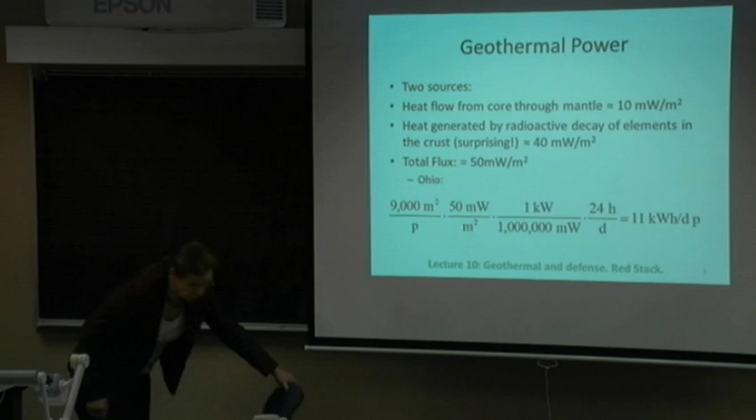So geothermal power, there's basically two sources. One is the core is molten, and there's the mantle, and there's heat flow from the molten core up through the mantle. It amounts to about, and notice the number here, 10 milliwatts per square meter. All those other energy sources we were talking about in terms of watts per square meter, but this is milliwatts per square meter, and this is surprising. There's also heat generated in the crust itself by radioactive decay of elements naturally occurring there. Amazingly, that's 4 times greater, 40 milliwatts. It's still not huge, but it's non-trivial, 40 milliwatts per square meter from radioactive decay.

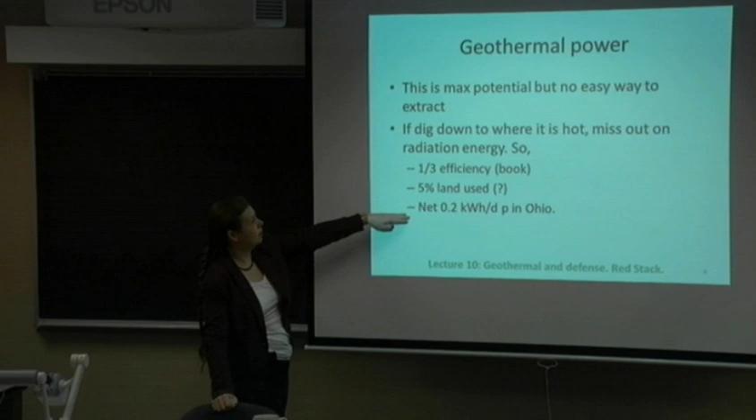So the total flux of heat from inside the Earth out is 50 milliwatts per square meter. If you figure that out for Ohio, how many people, and so forth, it works out to 11 kilowatt hours per day per person. Not insignificant, if we can get it. That is the max potential, but it turns out there's no easy way to extract all that heat. If you dig down to where it's really hot, you miss out on the radiation energy, because that only happens in the crust. So if you figure a third efficiency, this is the book's number, and maybe 5% of the land used - oh darn, maybe we could get 0.2 kilowatt hours per day per person in Ohio. Not as big as I was hoping.

So here's a quiz for you. Which is the lowest quality energy? Electrical, mechanical, chemical, or thermal? Oh, we have a shy class. How many people think it's electrical? No one's buying that. How many think it's mechanical? Nobody thinks that. How many think it's chemical? How many think the lowest quality energy is thermal? Right, which is what the Earth is offering us through geothermal. So it's energy, not the greatest, but it has uses like heating.

So how does it work? Well, if you happen to live in Mammoth Hot Springs, Yellowstone, there's hot springs there, and you can just put a tube and pump hot water into your basement and run it up through your house to heat it. Unfortunately, in Ohio it would be a pretty long way to pump that - I think they would run out by the time they got to North Dakota or so. So we don't have hot springs in Ohio that I know of.

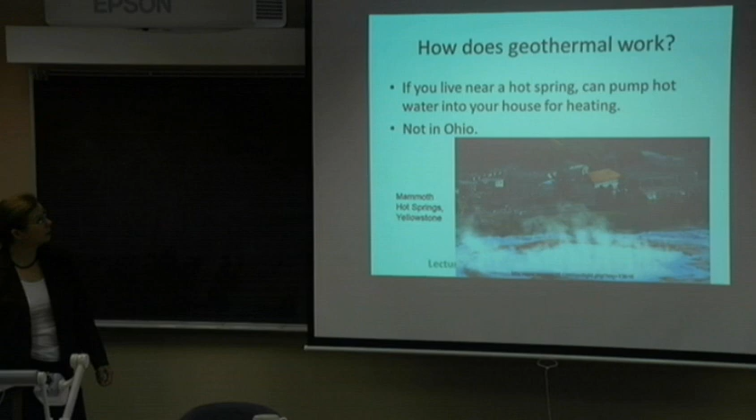Second way is a heat pump. The idea is you drill these wells - here's some vertical wells. Water is pumped out of your house. Let's say you're trying to cool, so you take hot water, because it's summer, pump it out here and down into the ground, and as it goes down it interacts with the cold earth, because the earth is 50 to 60 degrees maybe, and if it's 80 degrees outside, it's cooler down there. So as your water gets pumped through these tubes, it cools down and comes back as cool water, which you can then run through your house to try to cool it down.

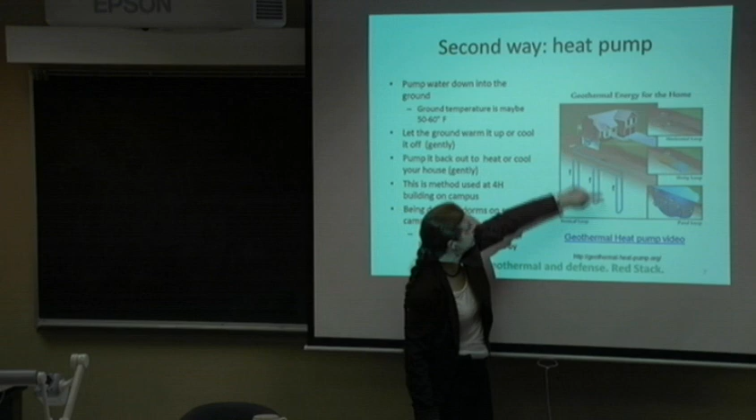So the water goes in there, and you're trying to either warm up the water, or in this case, cool it down. But in winter, I just reverse it. I still take the water out of my house and pump it down, but now maybe it's 40 degrees in the house and the water's cold, and I'm trying to heat it up to 50 or 60. It's not great, but it's something. I pump it back in and use it for heating. So I can only warm up or cool off the water gently because there's not a big temperature change, and then you pump it back into your house to gently heat or cool it.

This method is being used on the 4-H building on campus, next to the Schottenstein, with vertical wells. The building has a big parking lot out behind it, and before they built the parking lot, they drilled all these vertical wells. You go into the basement of the building, and they give tours sometimes - you should go if you get a chance. They'll show you all the pumps and stuff in the basement, and they've got monitors that show the temperatures of the water going various places.

They're also starting to do this for the dorms on South Campus, that big mess where they're drilling all those holes now. They ran into a bunch of problems because evidently there's a lot of water and mud underneath there, so when they're drilling these wells, they kept collapsing. I'm hearing this, I don't have it verified, but they had a lot of unexpected technical problems, and they're still putting them in. They are expected to supply about a third of the heating and cooling used by these dorms. So it's not a huge energy source, but it's something.

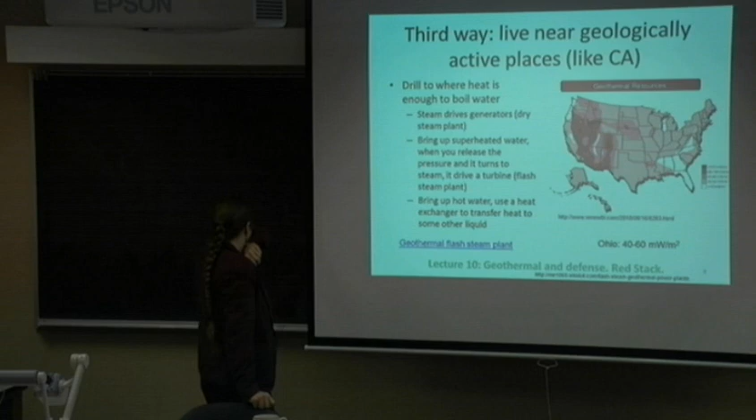A third way would be if you were living near geologically active places like California or Yellowstone. Then you can drill down to where the heat is hot enough to boil water. You take that boiled water, use it to make steam, and drive generators - that's known as a dry steam plant. Or you can bring up the water under pressure so it's superheated, and when you release the pressure it turns into steam suddenly, driving a turbine - that's a flash steam plant. Or you can just bring up the hot water and use a heat exchanger to transfer the heat to some liquid. A heat exchanger would be like two pipes near each other, or maybe one pipe inside another, where one is carrying hot water and the other cold water. The thermal energy will flow between them and exchange heat from one to the other.

Geothermal flash steam plant. Gosh, that looks like a link. Oh yes, it's going to work.

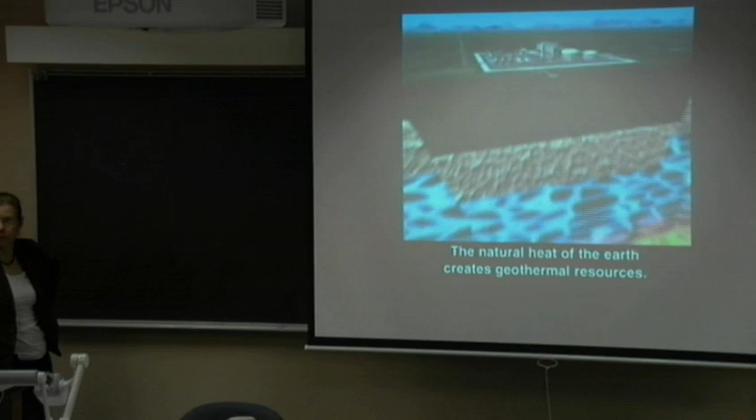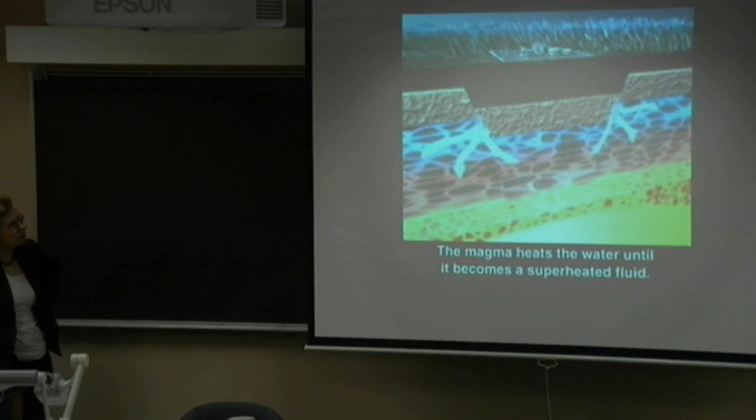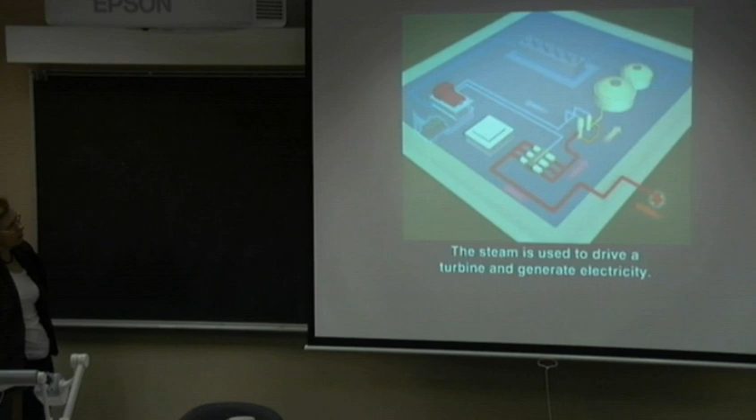Welcome to one of CalEnergy's geothermal power plants. Unlike other power plants that rely on coal or other fossil fuels to create electricity for homes and businesses, geothermal power plants use superheated fluids from the Earth's geothermal resources to generate electricity. The natural heat of the Earth creates geothermal resources. This heat comes from molten rock called magma, located at the Earth's core, deep below the geothermal resource. Over thousands of years, rainwater seeps through cracks in the Earth's surface and collects in underground reservoirs. The magma heats the water until it becomes a superheated fluid. To reach the superheated fluid, wells are drilled 5,000 to 10,000 feet below the surface of the Earth. These wells, called production wells, bring the superheated fluid to the Earth's surface, where it can be used to generate electricity for homes and businesses. This geothermal power plant uses crystallizer reactor clarifier technology, a process that turns the geothermal superheated fluid into steam while removing solids from it. The steam is used to drive a turbine and generate electricity. All remaining geothermal fluids are injected back into the reservoir for reuse.

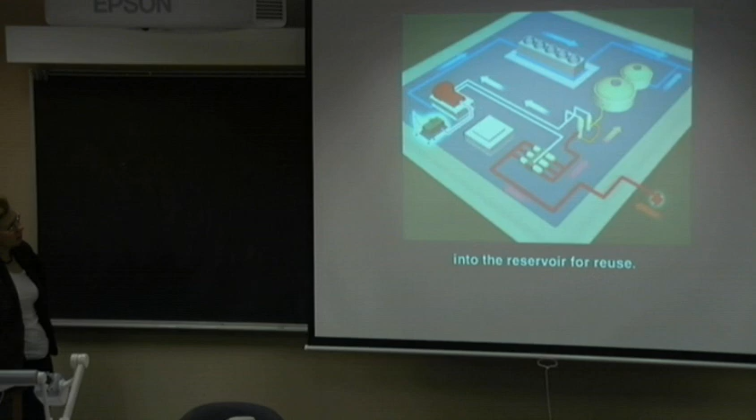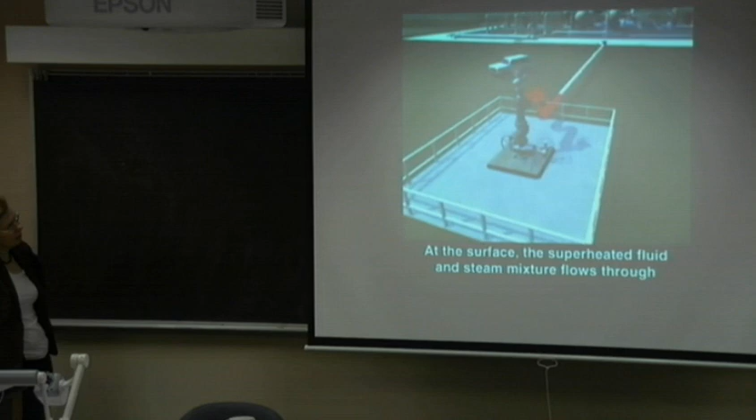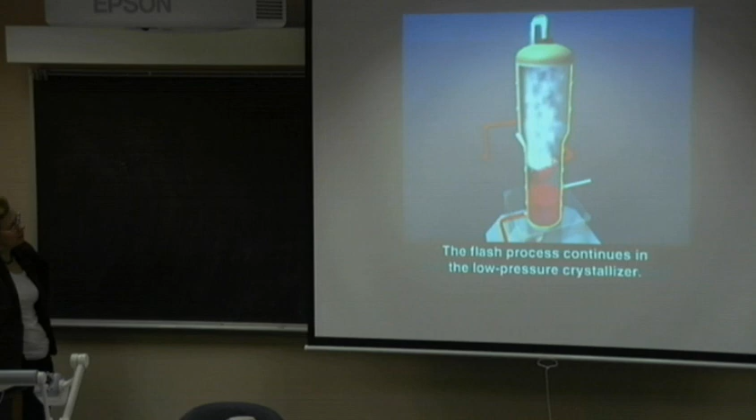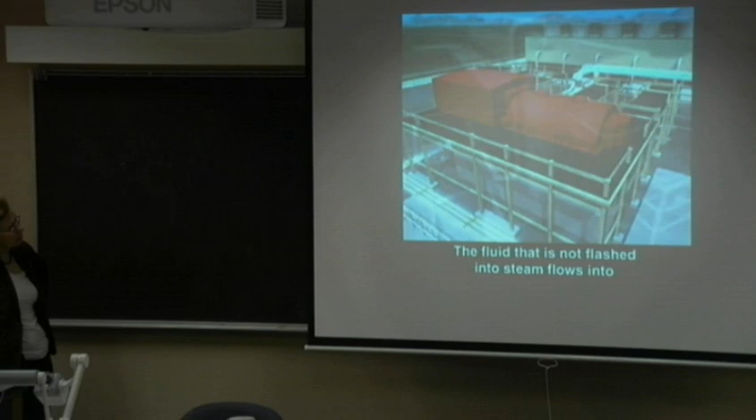Under its own pressure, superheated fluid from the geothermal resource flows naturally to the surface through production wells. As the liquid flows toward the surface, the pressure decreases, causing a small portion of the fluid still within the well to separate or flash into steam. At the surface, the superheated fluid and steam mixture flows through surface pipelines and into a wellhead separator. Inside the separator, the pressure of the superheated fluid is reduced, causing a large amount of it to rapidly vaporize and flash into high-pressure steam. The geothermal fluid that is not flashed into steam in the wellhead separator flows to a second vessel called a standard pressure crystallizer, where an additional amount of standard pressure steam is produced. The flash process continues in the low-pressure crystallizer, where the remaining fluid is again flashed, this time at a lower pressure, to produce low-pressure steam. All of the low pressure, standard pressure, and high pressure steam is delivered to a turbine. The fluid that is not flashed into steam flows into the reactor clarifier system and is then returned to the geothermal reservoir through injection wells.

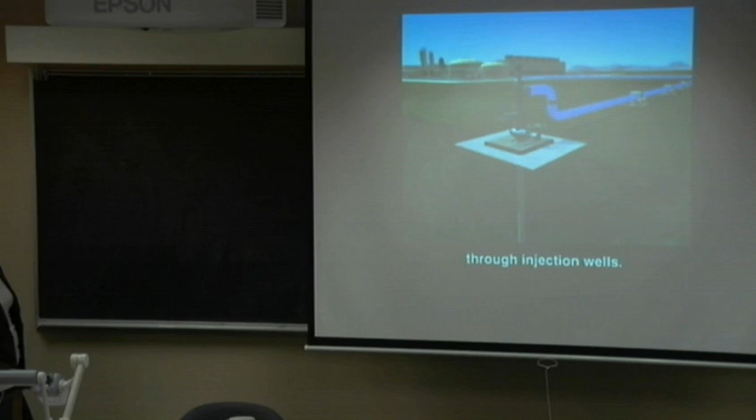Turbines are the primary piece of equipment used to transform geothermal energy into mechanical energy. Pressurized steam created from the geothermal superheated fluid flows through pipelines to large steam turbines. The force and energy in the steam is used to spin the turbine blades. The turbines turn a shaft directly connected to an electrical generator.

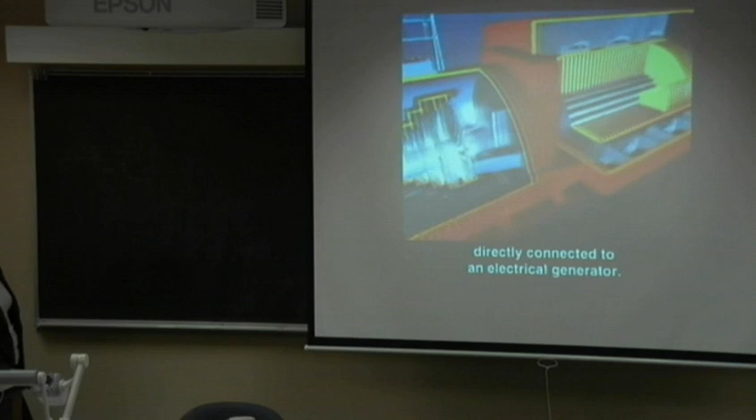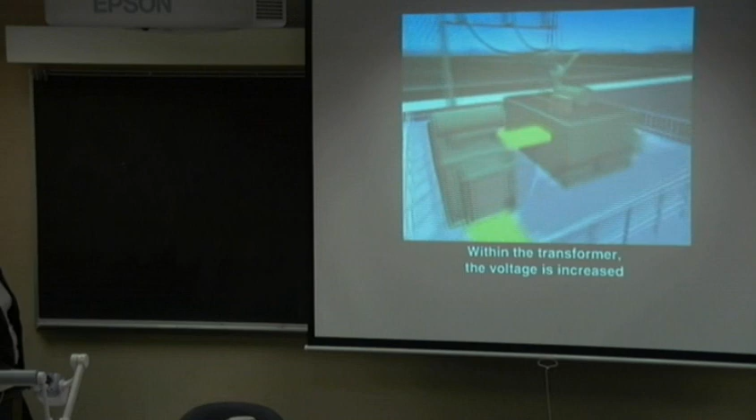An electrical charge is created when magnets rotate within the generator. Large copper bars carry the electrical charge to a step-up transformer outside the plant. Within the transformer, the voltage is increased before the power is sent to the power lines that carry it to homes and businesses.

Geothermal energy is a sustainable resource because with proper management, a geothermal resource can remain a renewable source of energy. Water trapped deep within the earth will naturally replace the superheated fluid that is drawn from the geothermal resource through surface wells. However, it is possible to deplete the geothermal resource by removing fluid faster than it can be naturally replaced. To help prevent this, the steam used in the geothermal power plant passes through a condenser that turns it back into fluid.

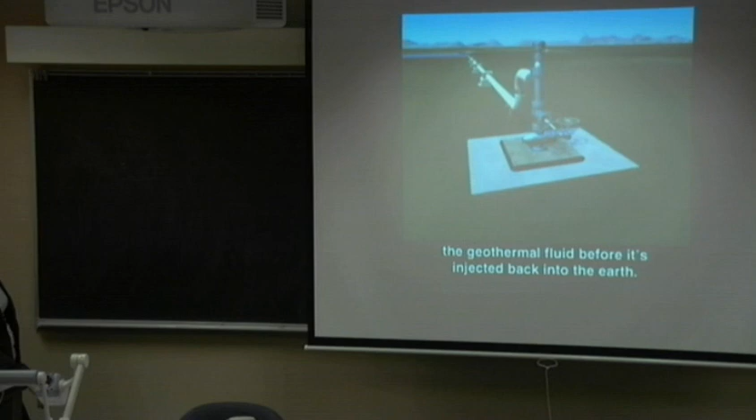At this stage, it's possible to recover minerals from the geothermal fluid before it's injected back into the earth. This condensed fluid, along with the fluid that did not flash to steam, is injected back into the underground reservoir. Magma naturally reheats the fluid so it can be used again.

I gotta figure out how to get out of here. One of these things. Oh, this. And this. What? Go away.

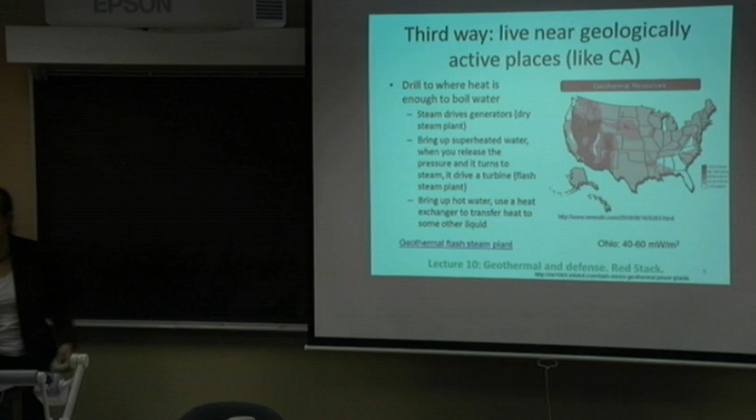So when they say if it's carefully managed, what do they mean? Is it if it's carefully managed, they can continue to bring heat out of this? The key is you can't bring out the heat too fast. You can't deplete that water supply, that superheated water supply, or if you're just taking heat out of bedrock, which we haven't talked about yet, you can't remove the heat too fast or it doesn't get replenished. So there's a maximum rate at which you can get energy out of these things.

According to this map here, Ohio is this color that says 40 to 60 milliwatts per square meter. If you live in these areas like Yellowstone, that would be good.

What's here? Is that Colorado? One of these is Colorado. I get them mixed up. I think that one's Colorado. I forget. I don't know what's there.

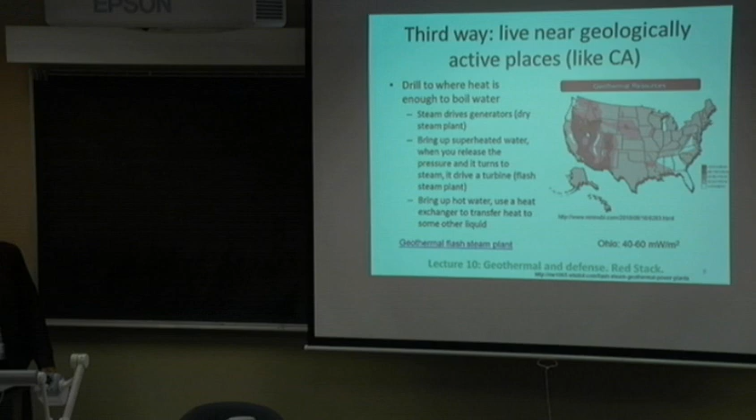So here's some guidelines. No 3D ever. The only time you ever want to use 3D in a plot is when you actually have three-dimensional data. There's a term for it, chart junk. It's superfluous. It doesn't help convey the message. It just looks fancy and doesn't do any good.

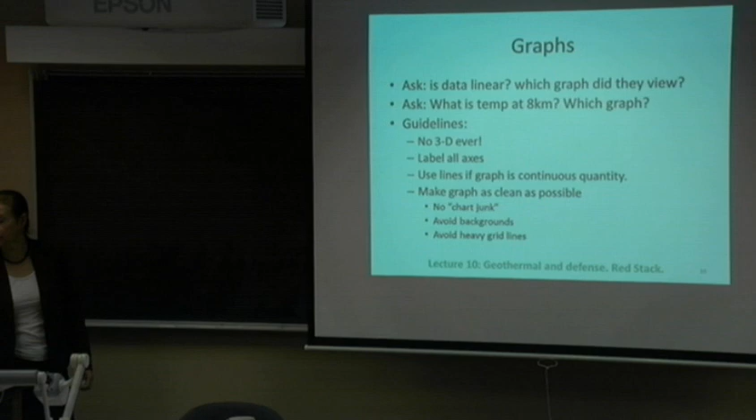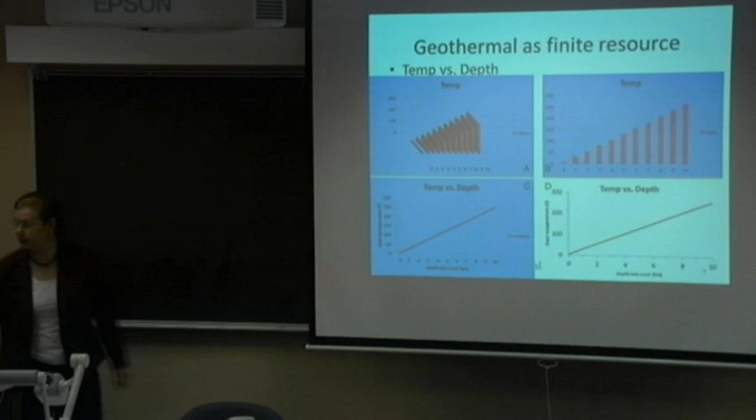Label all the axes. Use lines if the graph is a continuous quantity. So here, the data is continuous. Here, it's shown as if it were discrete, but there's actually a value for 8.5. So if you have continuous data, you want to draw a line graph. If you have discrete data, you might put points here, or you might use a histogram or a bar chart.

No chart junk, make the graph as clean as possible. Here's an example. Who needs this, right? There's only one line on this curve, so I don't need this to tell me that it's temperature, because I know it's temperature versus depth, so I would get rid of that. It's just an example of chart junk. A lot of times when you use Excel to plot things, it puts all that stuff there, and it's hard to get rid of. So just be thinking about that, especially for making presentations. Avoid heavy grid lines.

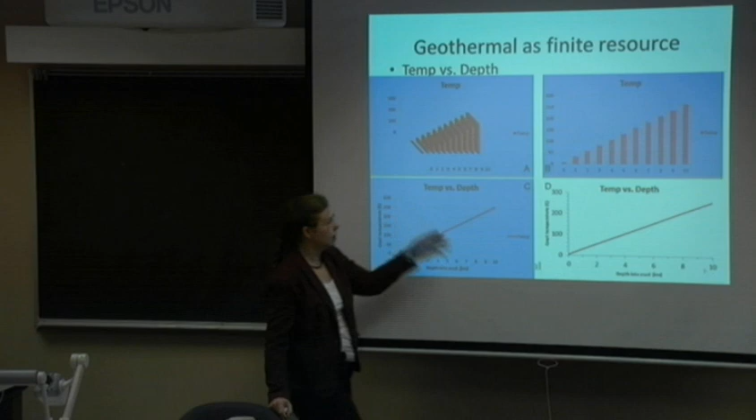I don't see heavy grid lines there. Actually, if you're making a presentation, like on PowerPoint, there's no real point in putting all these tick marks. The reason you put tick marks on a graph is because someone with a piece of paper can take a ruler and read values off the graph, and write on the paper. But on a chart, no one's going to do that. So if there's a particular point you want someone to notice, like 8 kilometers, get rid of the tick marks and just put the point there and say 200 degrees.

Or whatever that unit is. Current crust temperature in degrees Celsius. Well, too late. All right, so back to our regularly scheduled program.

So geothermal is a finite resource. It'll be there for a long time. We can extract energy at a finite rate. And effectively, what you're doing is mining heat.

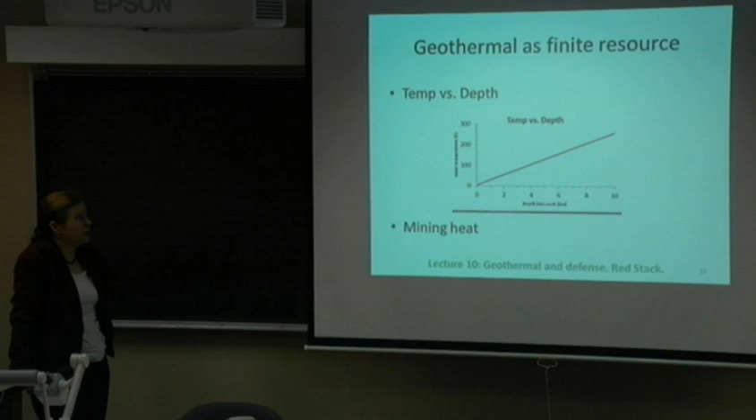So, geothermal mining. How many kilowatt hours per day, assuming Colorado—let's pick Colorado because they had some geothermal stuff there—extracts 100 degrees C from a cubic kilometer of crust. This is up above the mantle at, say, 10-kilometer depth, once every year. Notice you could do that every year, so you could keep doing it, but there's a limit to how fast you can take it per year.

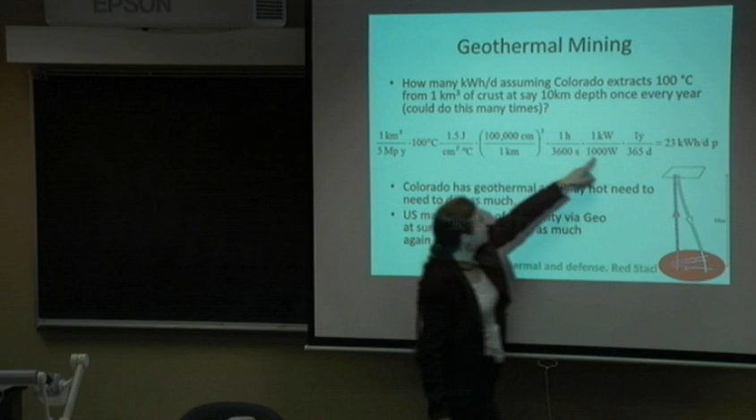So here's 1 cubic kilometer per 5 million people per year, 100 degrees C, converting joules per cubic centimeter—this is specific heat, et cetera—and it works out to 23 kilowatt hours per day per person if you live in Colorado. So Colorado has geothermal energy.

For us, the number turned out to be... well, she didn't assume 5% of Ohio, or of Colorado that I see. I think she's assuming 1 cubic kilometer of crust. So I don't know if we can compare that number to ours, because we did it by saying 5% of Ohio we were extracting. But Colorado has geothermal, so they may not need to drill as much. It may be cheaper for them to make geothermal energy because they have bigger temperature differences there.

The U.S. currently makes about 1.1% of its electricity via geothermal at the surface—that's hot springs and pumping hot water—and maybe as much again for heating, so geothermal wells like we have on campus.

So I tried to find some information about Ohio. I found that the Ohio caverns, which are about 100 feet deep, are consistently 55 degrees Fahrenheit, so wear a sweater when you tour them. The salt mine in northern Ohio is 2,000 feet deep, and it's actually hotter, 80 degrees Fahrenheit. And if you go deeper yet, like oil and gas wells, maybe 8,000 feet, it's 160 degrees Fahrenheit. Notice it's not boiling yet.

Heat pumps, shallow heat pumps, are widely used. That would be like what we have out in the parking lot of the 4-H building. Can we add it to the stack? I wanted to add this to the stack for Ohio. I was trying to figure out how to find numbers.

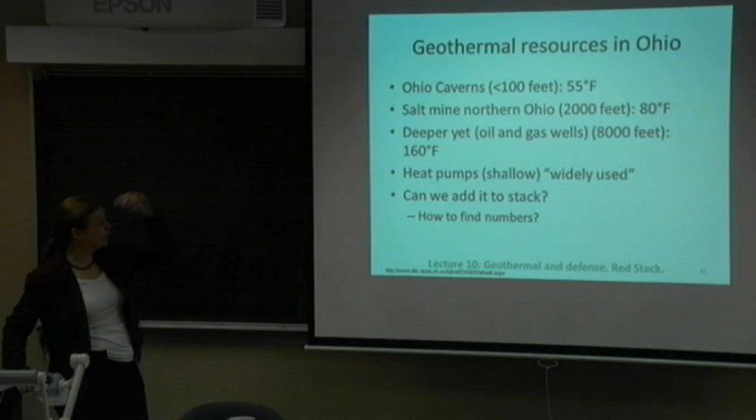So I thought, well, I know that heating and cooling depends on the energy difference between a hot and a cold place. OSU dorms are not currently air conditioned, at least the ones they're putting the heat pumps in for. The ground temperature is 55, so maybe the maximum temperature difference would be about 40 degrees Fahrenheit. And then I got stuck, so I tried another approach.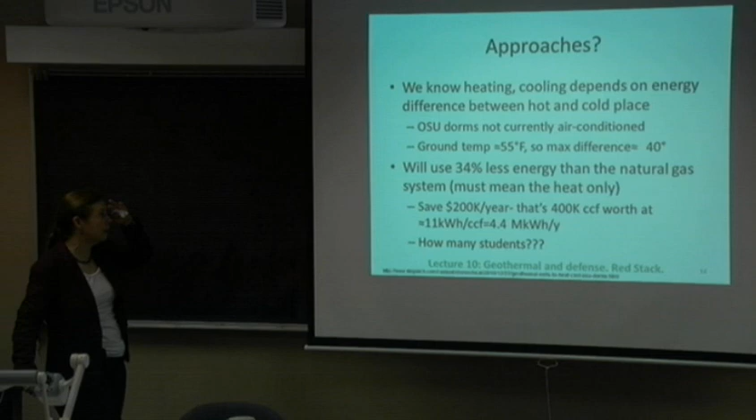I thought, well, I read in the Lantern that these pumps are going to use 34% less energy than the natural gas system. But I'm thinking natural gas, you don't use that for cooling, only for heating—you use electricity for cooling. So that must mean the heat only. And they said it was going to save $200,000 a year.

So, $200,000 a year—I looked up how much natural gas that would be. It'd be about 400,000 CCF, something about cubic feet, though I don't remember what that stands for. I worked out how many megawatt hours that is, and found how much natural gas costs. But then I couldn't find a figure for how many students were in those dorms, so I still don't have a number. I'm just trying to give you some ways I was approaching the problem.

All right, so here's where we are now, if you live in the UK. So we are out of sources.

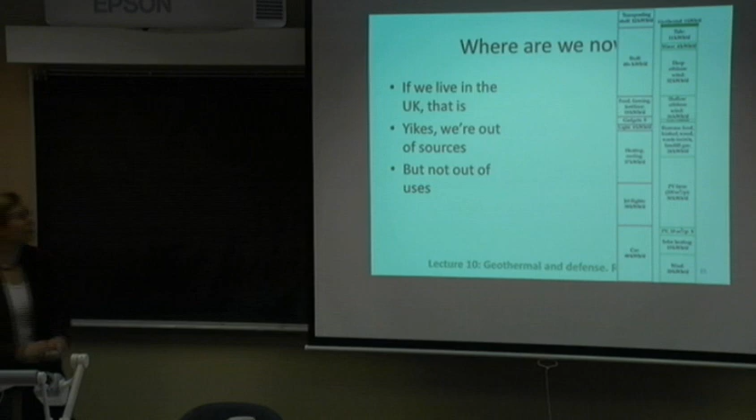We've used every sustainable energy source that we can think of. Except for nuclear, which is not on here - we're going to talk about nuclear in a later class. Some people want to add it to the stack, and some people don't. We're going to treat it separately, and I'll let you decide. We're out of sources, and we already have more consumption than sources, but we're not out of uses yet.

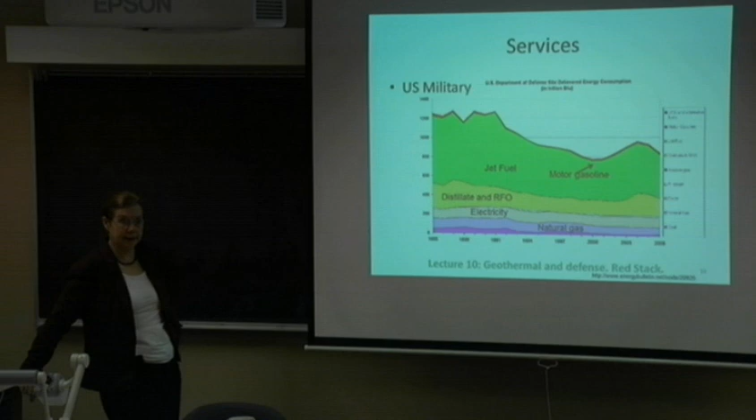Here's another example of something we spend energy on, which is defense. Here is a plot for the U.S. military, and this pink thing - so here's some chart junk. I tried to put some letters on here, or maybe they put some letters on here. Coal, that's this - the military doesn't use that much coal.

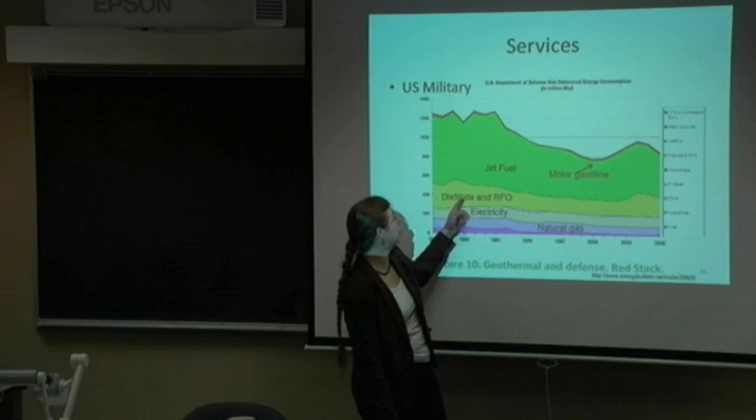They use some natural gas. This is electricity, distillate, and... what's that? I don't know what distillate is either. But look, jet fuel - whoa, I know that's made out of petroleum. And motor gasoline is not that much. This is used for those convoys in Afghanistan.

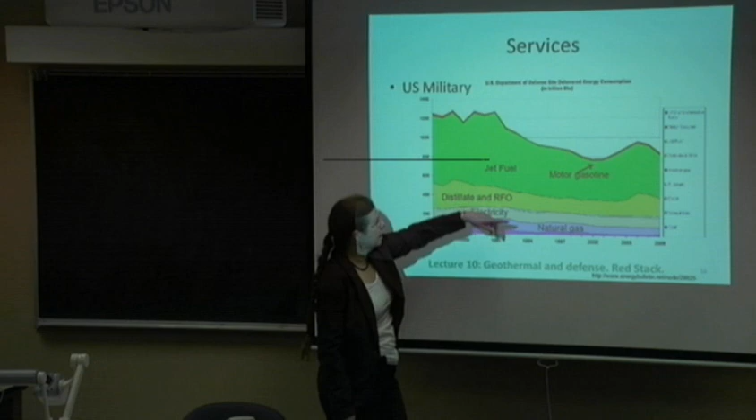So we can, from this, get a feel for how much energy the military uses. I got some 2008 numbers that are not on this graph, and the answer was 890 trillion British thermal units, which works out to 260 billion kilowatt hours per year. If you divide that by the population of the United States, it's 2.3 kilowatt hours per day per person.

This didn't include nuclear, so I added in MacKay's estimate for our expenditure in nuclear defense for the last 50 years - that was another 1.7 kilowatt hours per day. So nuclear is included in this military number. With that, our number came out to 4 kilowatt hours per day per person, which surprised me because it's the same as the UK. I would have thought we've got this massive, massive military - of course, we have more people. So 4 kilowatt hours per day per person.

So here's a summary for the UK. Geothermal is not that significant. The services and military is a small but significant chunk of energy use.

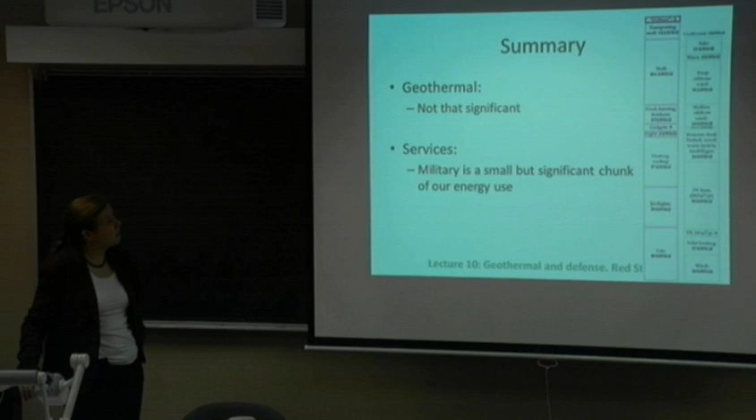All right, so now we're pretty much done with the stack. Let's go back and review some stuff here. What does a person in the UK or the USA use the most energy per day for on the average? We have heating, transportation, food production, or defense and services. Heating, transportation - we got bites on transportation. Food production, defense, heating.

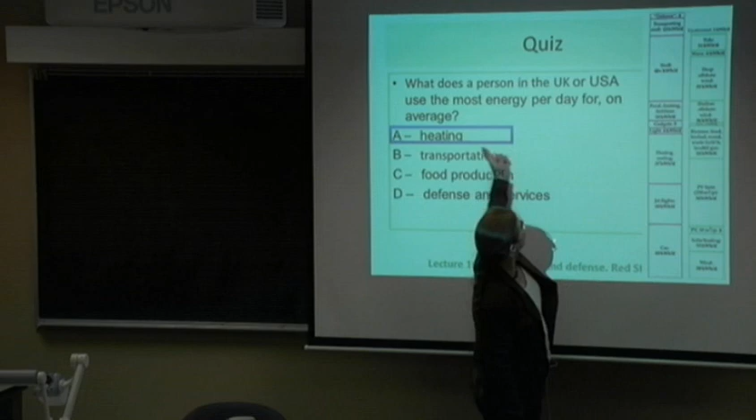Here is the graph again. I don't think this is right because here's the car and the jets and then transporting stuff up there. I think this is wrong - yeah, transportation. So cars, planes, transportation of food, transportation of other goods totals about 85 kilowatt hours per day per person for the UK, and who knows what it is for us, probably something like that.

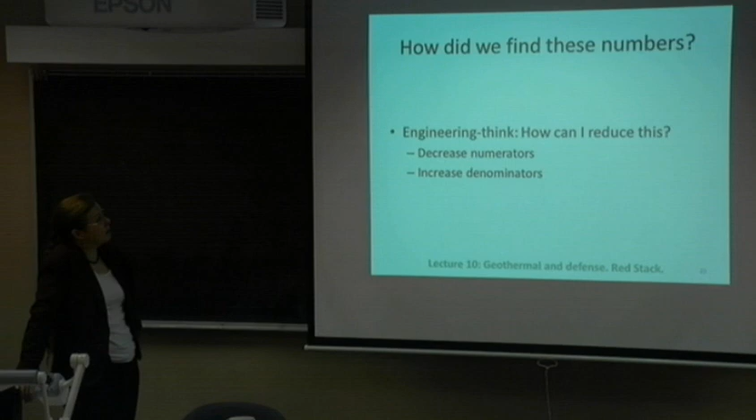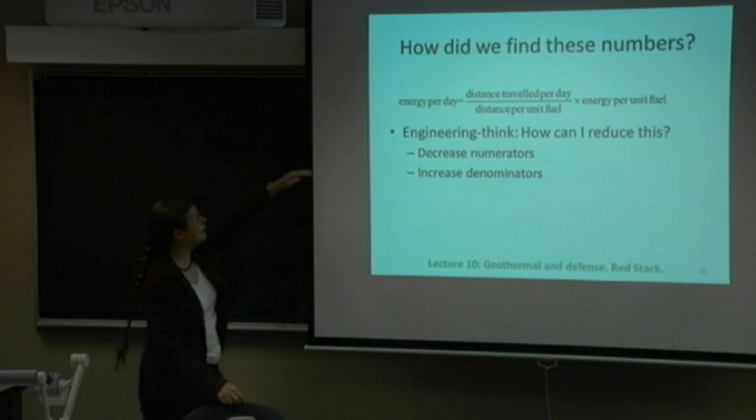So how do we find these numbers? This is how engineers think about it. We take the equation for whatever we're doing, and we say if I want to increase or decrease this quantity - let's say I want to decrease the energy per day - then I've got a fraction here. To decrease this, I should make the numerator smaller, or if I divide by a big number, I can make the result smaller. So I want to decrease numerators and increase denominators. I could have also changed the amount of time, but that's cheating - can't do that here because I want to compare it to other numbers.

So I want to decrease numerators and increase denominators. All right, here's a quiz. Which renewable method can contribute the most energy per person in the UK? Solar thermal and PV, wind on land and sea, biomass, or tide and waves? I don't know if this is going to circle the answer. Oh look, here's the chart.

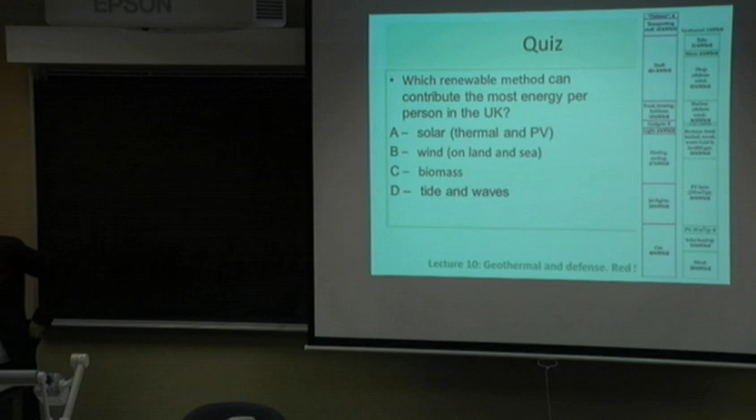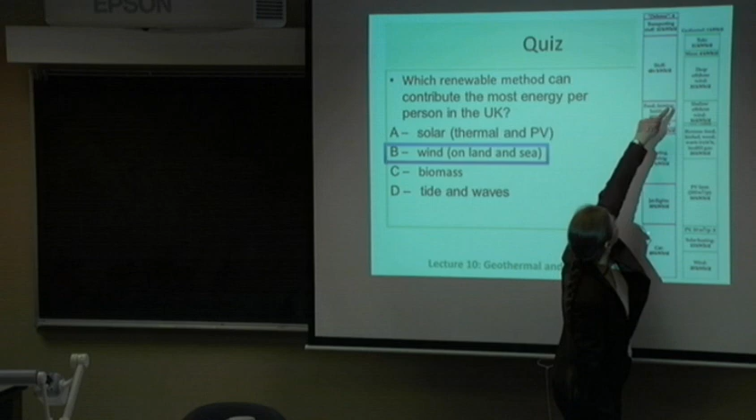What do you guys think? Solar? It's not going to be biomass, it's not going to be tide and waves. Solar - this says wind. Here is 13, 10 is 23, 50 is 73 - that's solar. Wind is 16 and 32... what's that, 48? What was the first number? Bottom 120, it's 60 - oh yeah, 60? So wind is still less than 73. Oh yeah, you're right. So who made this chart? Clearly whoever it was on drugs.

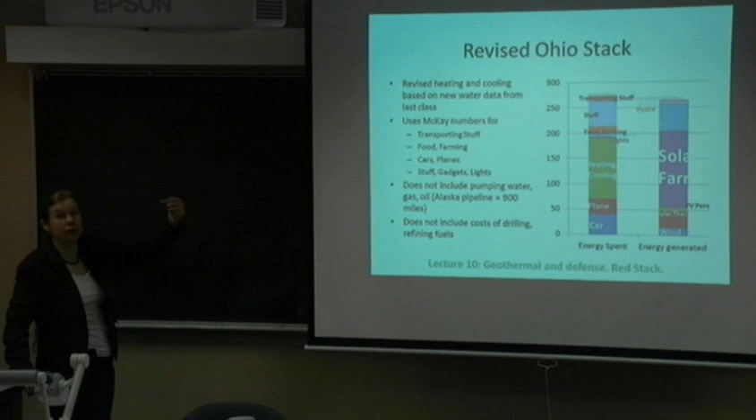So here is for UK. In Ohio, notice I have revised the Ohio stack because we found some more recent data that showed our water usage was much greater. The data we used to compute our original numbers said UK used 50 units - I forgot what the units were - and the US used 70, and then we found some other data that said we used like 2 or 3 times as much. So I used that more recent data, and that changed the heating and cooling number considerably here. So I just want you to know that I monkeyed with the data.

Some of this is based on calculations for Ohio, and some I couldn't find numbers for Ohio, so I used McKay's numbers for transporting food and farming stuff. Cars and planes - actually the cars numbers are comparable for both countries, but for planes we don't have any idea. Stuff, gadgets, and lights I said were comparable, but I couldn't figure out how to get data for that.

Notice this does not include the energy we use to pump water from the reservoir to your house, pumping gas or delivering it to your gas station, or pumping oil, or natural gas to your house so you can light the stove. Then there's the Alaska pipeline - those things aren't included. And it does not include the energy costs of drilling or refining the fuels, but neither do McKay's numbers.

So it's not looking too good.

Which renewable method can contribute the most energy per person in Ohio - solar, wind, biomass, or hydro?

What do you think? Solar. Yeah, so why are we putting in wind? It's got to be cheaper. Got to be.

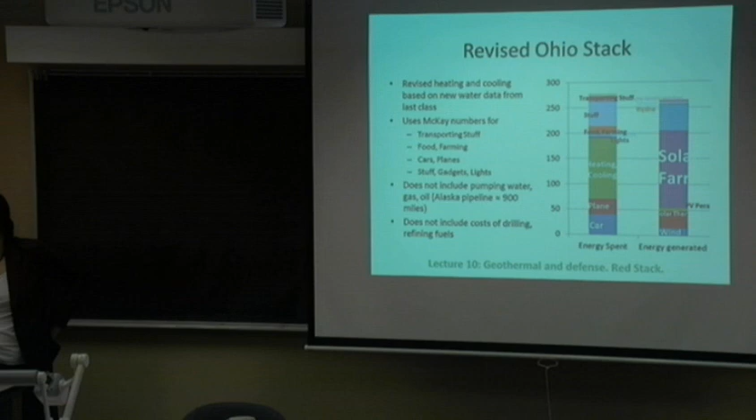What? Biomass, 22 kilowatt hours per day? Let me go back. I don't even see biomass on here. I think that's got to be a typo.

So how do our estimates look so far? Here's the UK estimates - he's estimating a use of 195 kilowatt hours per day per person. Let's remember that number because we're going to look at this stuff in a bunch of different ways.

And possibly could generate 180 kilowatt hours per day per person. For the USA, greater than 250 kilowatts - we're not exactly sure, I think my last number was 270. But we have more potential for production at 250 kilowatt hours per day.

The green stack makes a lot of assumptions. So you believe those are not realistic estimates? Do you believe those are optimistic?

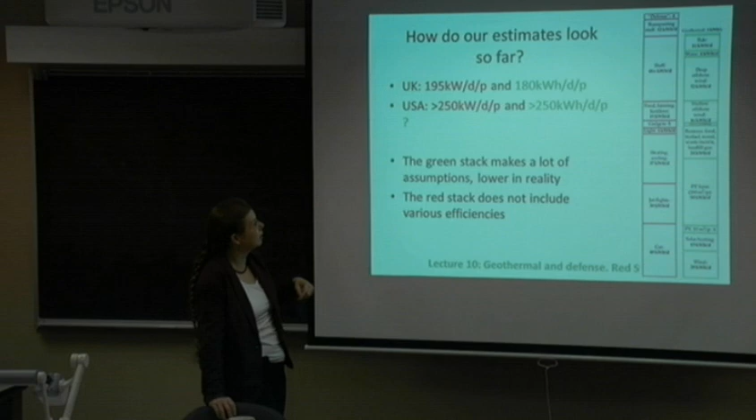The red stack does not include various efficiencies, and I'm not sure what's meant by this because we included the efficiency of extracting - for example with solar we include the efficiency in there. I think it must mean it doesn't include the efficiency of refining the oil and that kind of stuff.

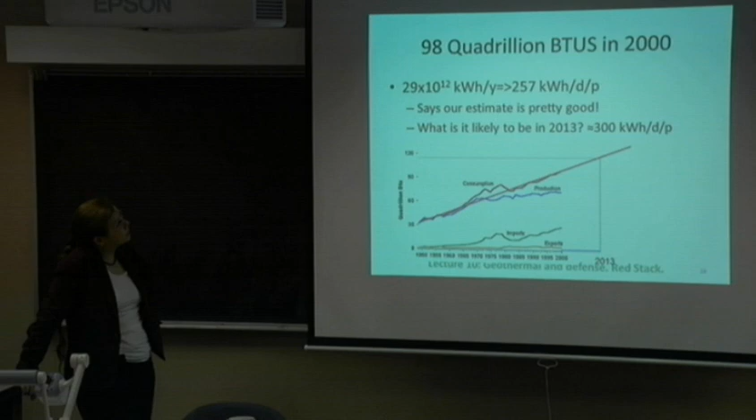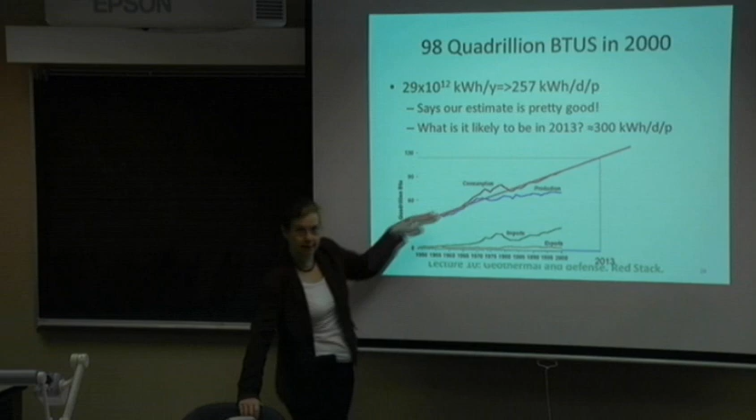What's it likely to be in 2013? So I just drew a line - this is a guess, I did not do an exponential fit for you mathematicians. I took a line out to 2013, extended this to scale, and I'm thinking maybe 300 kilowatt hours per day per person might be our current consumption, based on extrapolating this graph, not based on the estimates we did for the various consumptions in our stack.

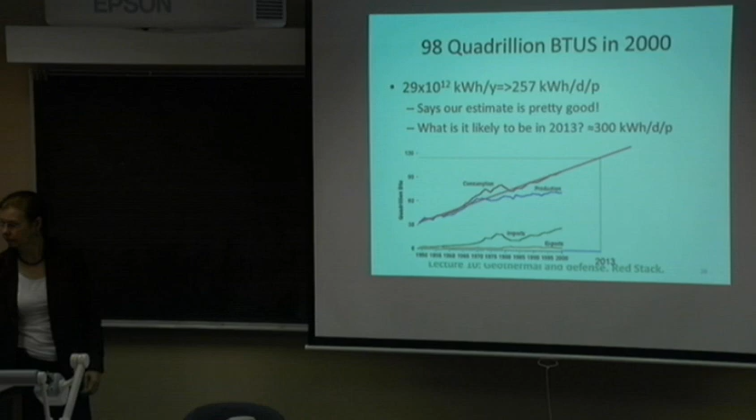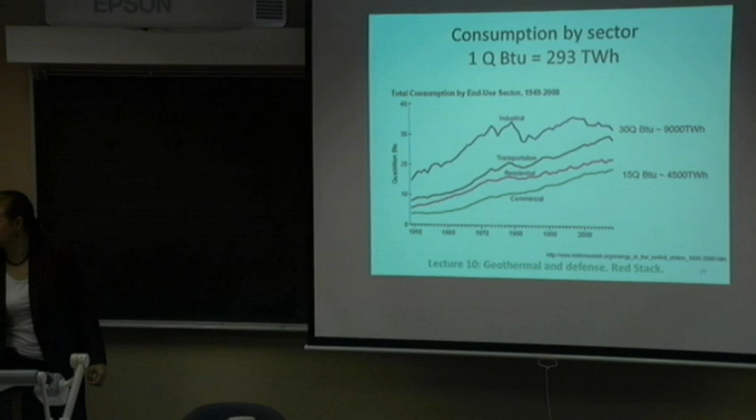This data comes from Minnesotans for Sustainability dot org. I don't know why, but there you have it.

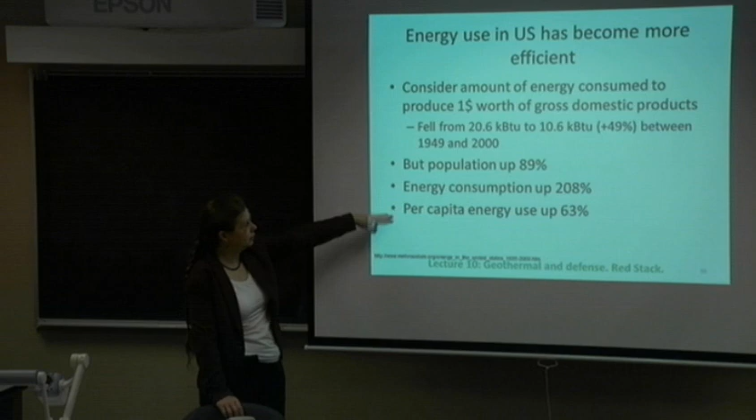However, we're producing more stuff. Our population is up 89%. Our energy consumption is up 208%. Our per capita use - you and me - is up 63%. If it hadn't been for these improvements in efficiency, we'd be much worse off than we already are.

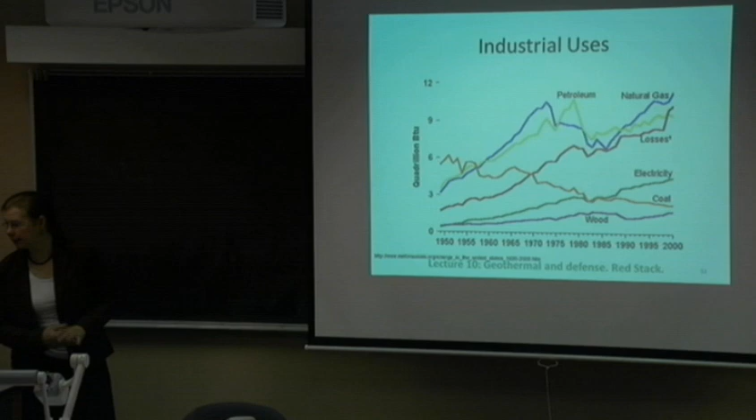I believe that there was, from reading The Quest, which has turned out to be very good, an increased interest in natural gas right here where people thought it was going to be cheaper, then the prices shot up, and now people are looking at it again.

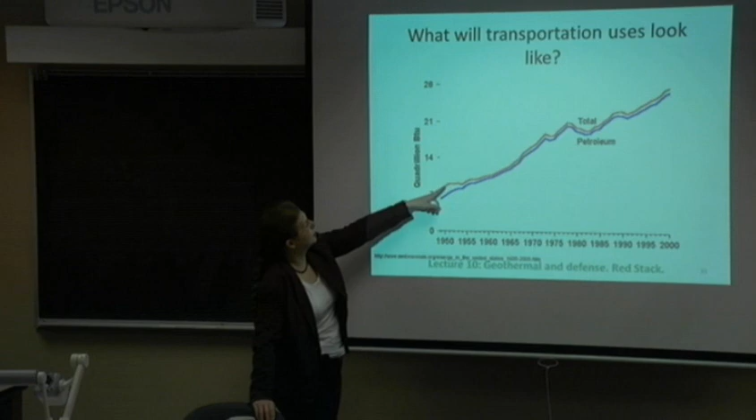What will transportation use look like? Here is petroleum and total transportation, so again reinforcing petroleum is primarily used for transportation. We're not burning it to create electricity much.

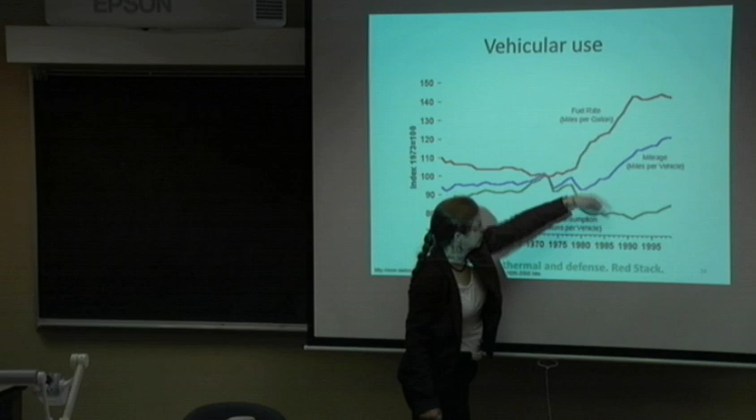Fuel rate, miles per gallon. Whoa, this says we're driving more miles. This is per vehicle, and this is miles per gallon - so we're driving more.

Oil embargo, energy crisis happened there. That's why they picked that time.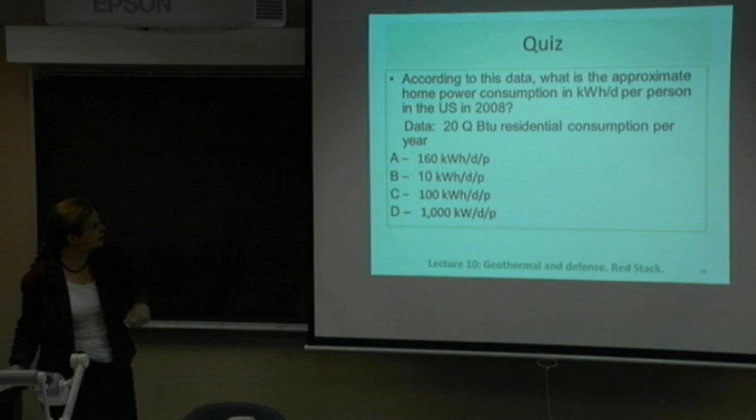According to this data, and I'll show you the data again, what is the approximate home power consumption in kilowatt hours per day per person in the U.S. in 2008? Oh, here's the data - 20 quad BTUs residential consumption per year.

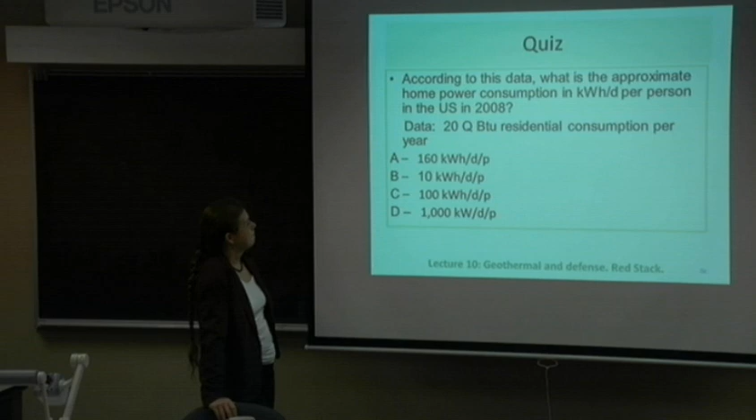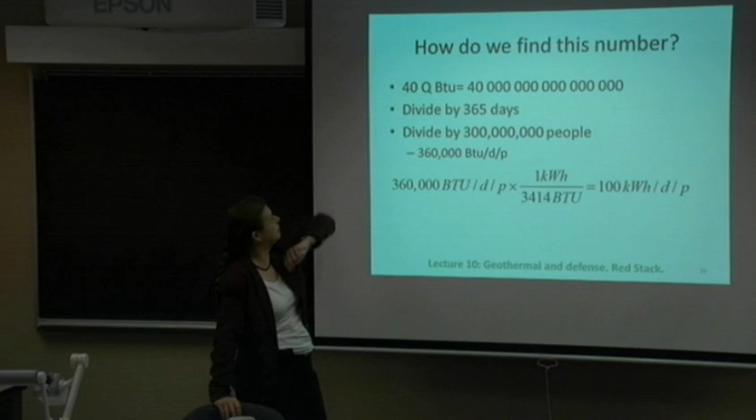This is an approximation, so here's a calculation. 40 quad BTUs is that many zeros. I divided by 365 days per year, divided by 300 million people - we have a little bit more than that. I got this many BTU, took that per day per person, converted it to kilowatt hours - 100 kilowatt hours per day per person.

That's just residential. And we said our total usage for the U.S. was maybe 250, 270, 300 kilowatt hours per day per person. So about a third of that is going to residential.

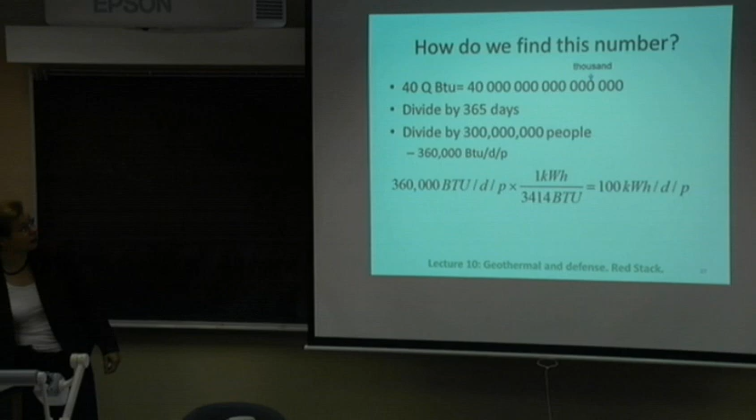It didn't say resident - yeah, it did say residential. There's a little bit of a disconnect there, driving home the point that it's hard to get good numbers. 1,000. Oh - yeah, as if you didn't know.

According to this data, what is the approximate total power consumption in kilowatt hours per day in the U.S. in 2008? About 100 quads BTU. Total power consumption kilowatt hours per day - I believe what we're doing is adding up the commercial, the residential, transportation, and industrial, add up those four numbers.

270. This sort of corroborates our estimate. We said we knew it was going to be more than 250 when we were building up our stack. Just another way to try to get at that, see if our numbers make sense.

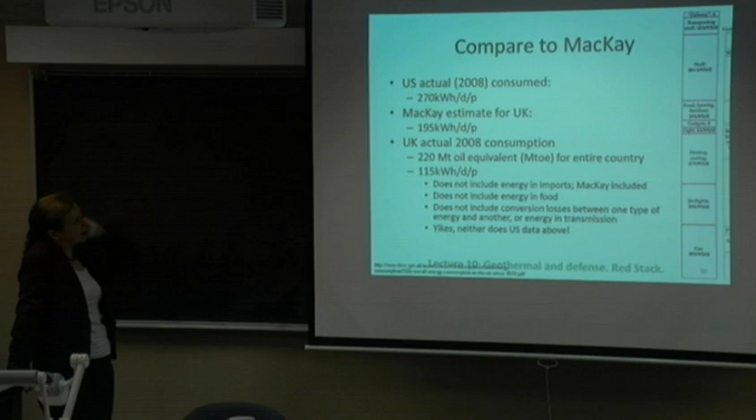Compare to MacKay, U.S. actual, according to that data, was 270. MacKay estimate for the UK was 195. UK actual consumption was 220 million tons oil equivalent for the entire country, 115.

Here's his caveats: doesn't include the energy in imports, which MacKay included. Does not include the energy in food, which MacKay included. Does not include conversion losses between one type of energy and another, or energy in transmissions. But, of course, neither does the U.S. data. So if we compare this number to this number, we're far worse than the UK.

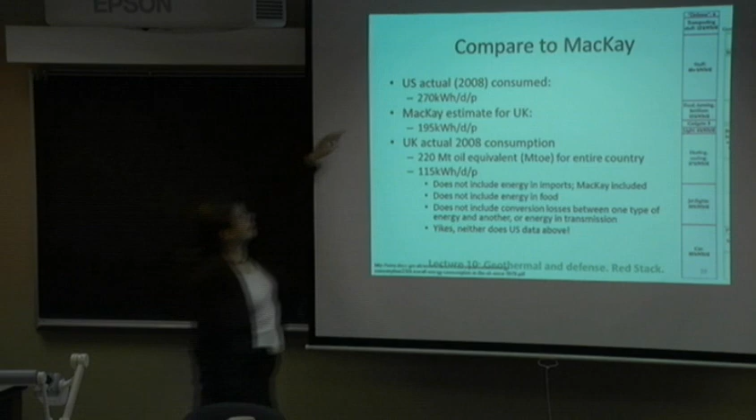This number came from this chart here, but the 250 or greater that we had before came from some wild guesses on our stack. Well, they weren't too wild, but they might be partially wild, slightly domesticated.

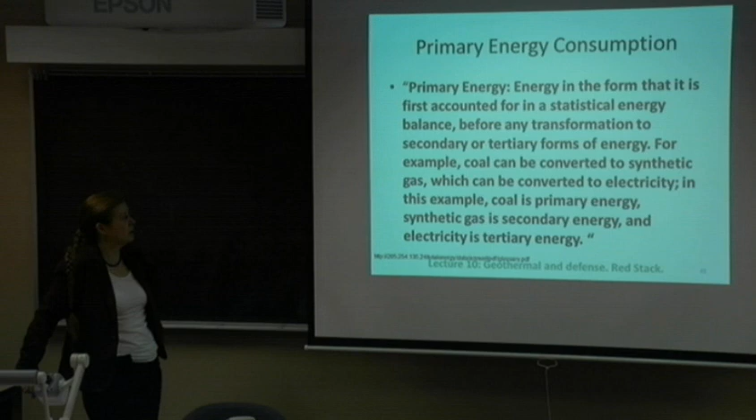Efficiency of energy delivery, primary and total consumption by sector, 2008. Primary consumption, I believe, means energy in the form that is first accounted for in statistical balance before any transformation to secondary or tertiary forms of energy. For example, coal can be converted to synthetic gas, which can be converted to electricity. In this example, coal is primary energy, synthetic gas is secondary energy, and electricity is tertiary energy.

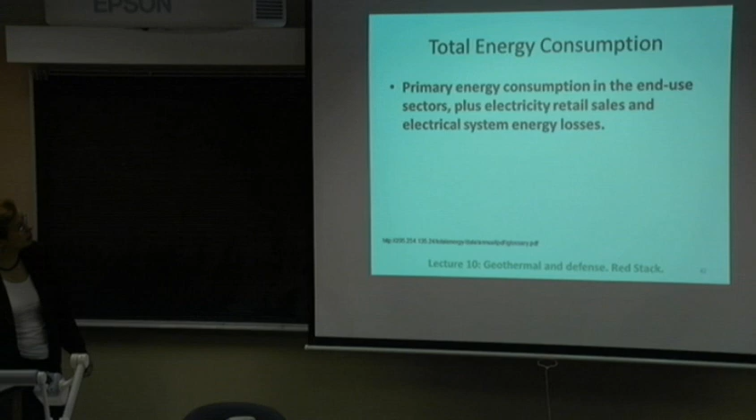How do the major energy sources balance? Residential, commercial, industrial, transportation. So residential, here's renewable energy at residences, it's pretty small. Oil, electricity, natural gas for my stove, electrical losses - whoa.

Commercial, we don't see renewable energy on this one at all. Coal is down, electrical losses, electricity. Industrial, here's some renewable energy.

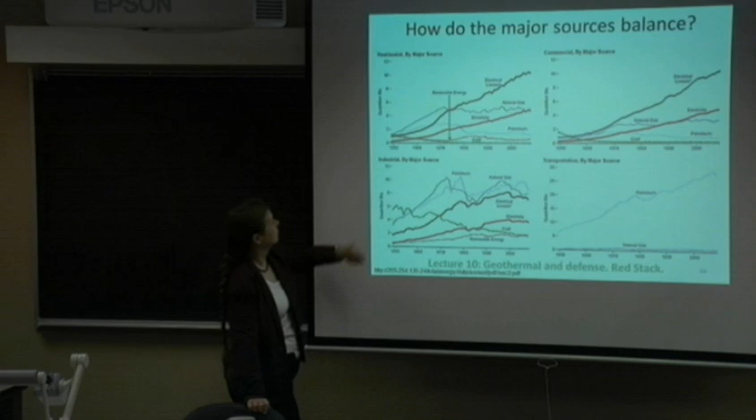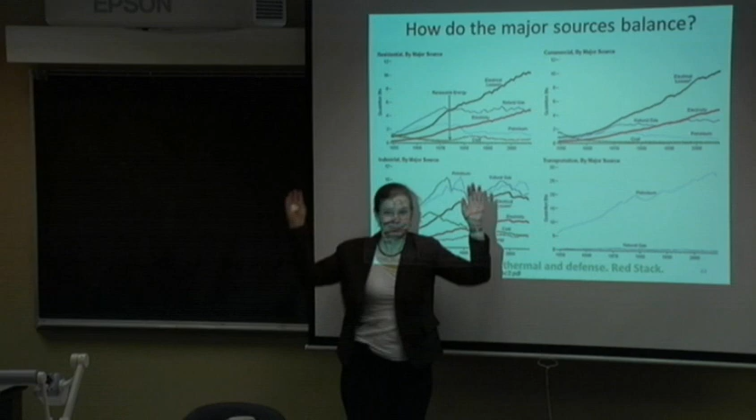I wonder if some of that isn't hydro. Not so much coal, electricity, electrical losses, gas and petroleum. Transportation - here's natural gas, here's petroleum, we're done. No electric vehicles shown there because this only goes up to 2010, looks like.